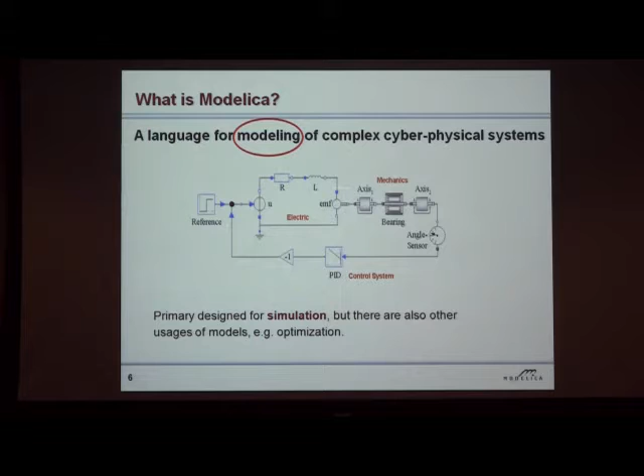So Modelica is a language for modeling complex cyber-physical systems, primarily for simulation, but increasingly used for other things like optimization together with models and generating embedded code. Modelica is a language, not a tool. The language is defined by this document, the open language specification. It's standardized by the Modelica Association, which is a standardization organization, but it's also promoting its development.

And there are at least 7 tools around. Here are some of them. I will talk mostly about OpenModelica from the Open Source Modelica Consortium. Here is a tool called MathModelica from MathCore, which nowadays is owned by Wolfram Research in the US. There's Dymola from Dassault Systèmes, which is the most widespread industrial tool. There is another industrial tool from a German company, and MapleSim, you know about, from Maplesoft in Canada.

So Modelica has a number of nice properties. It's declarative, which means that you can state equations and functions. It's multi-domain, so it's not for a single application domain; you can use it for many different application areas and write libraries for different areas. Everything is a class, a uniform design for object-oriented component programming. It's designed to be efficient from the start. Strongly typed language.

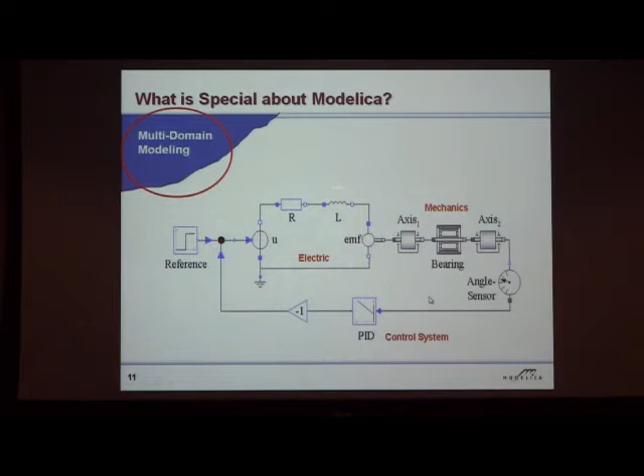I will focus on four properties of Modelica: multi-domain, visual, typed, declarative language, and hybrid modeling and simulation. So let's start with multi-domain. Here we see mechanics, electrics, and control mixed in one model. So we use model components from three different areas.

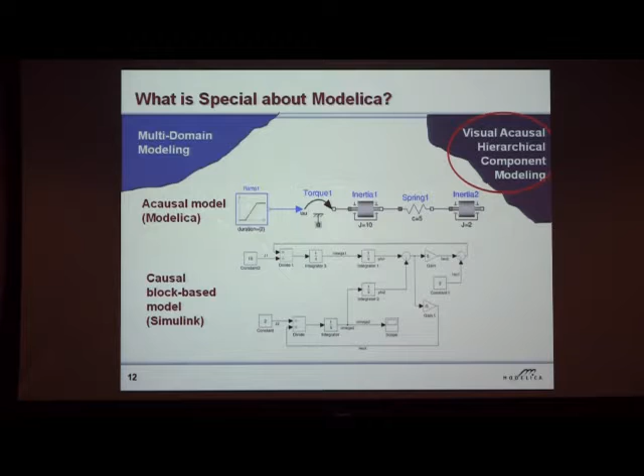Hierarchical component modeling. Here is an acausal model in Modelica where we just connected a few components. Here is a causal block-based model, which is a typical Simulink signal flow model, even though nowadays there are also libraries supporting acausal modeling in Simulink, like SimMechanics. So this keeps the physical structure, whereas the other one you have to convert by hand to signal flow.

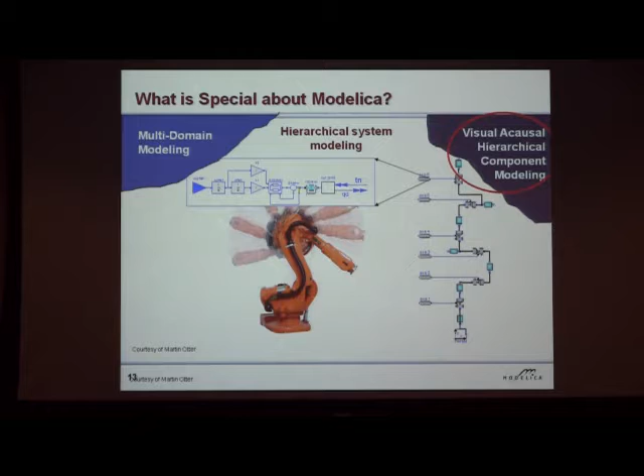Hierarchical system modeling is quite important in order to handle large systems. Here is an ABB robot. Here is the top level of another robot. You just see a few things, motors, gears on the top. Then you can expand, so you can see more detail by looking inside. You can expand that. Then at the lowest level you have equations.

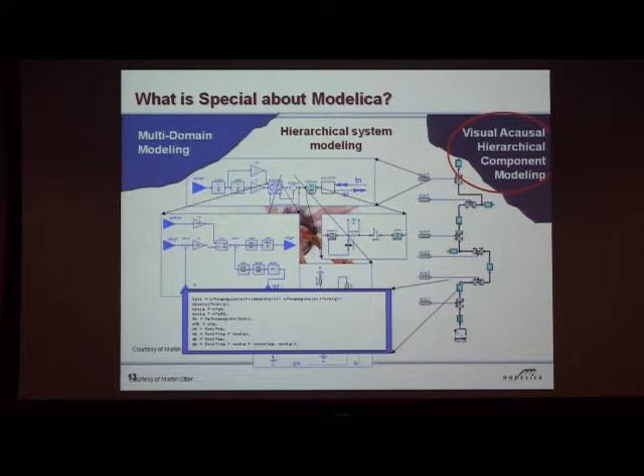So here we have some Newton equations with 3x3 coordinate transformation matrices, typical when you have robotic arms and so on. This has been made at DLR, Martin Otter, where they work a lot with robots, industry robots.

Then we have the language. So this Modelica language is, as I said, standardized. There's a standard document, and it's a textual language, even though it can be used for graphical modeling. But it's nice that it has a textual representation in addition to graphical, because sometimes textual is better and you can do more concise programming. But if you do the graphical, you can use the Modelica standard libraries.

The object orientation is used as a structuring concept. So it's used for decomposition of complex systems. It's used for inheritance, for specialization. But it's not used for message passing, as you have in Smalltalk. But if you start in the history of object-oriented programming, starting with Simula, there was actually no message passing from the beginning. We had classes, behavior, objects, and methods. In Modelica we don't have methods, but instead we have equations for expressing behavior, and also functions.

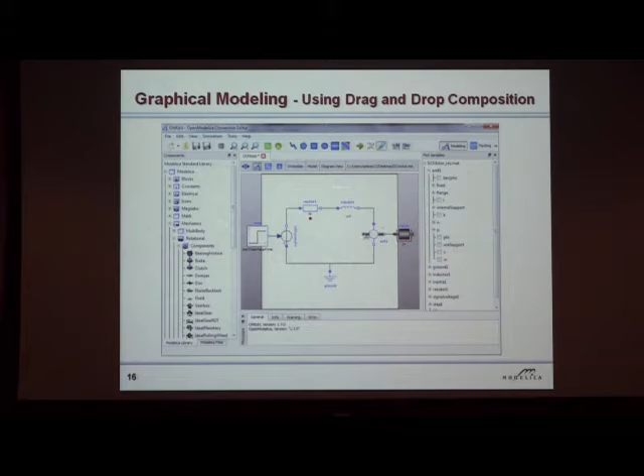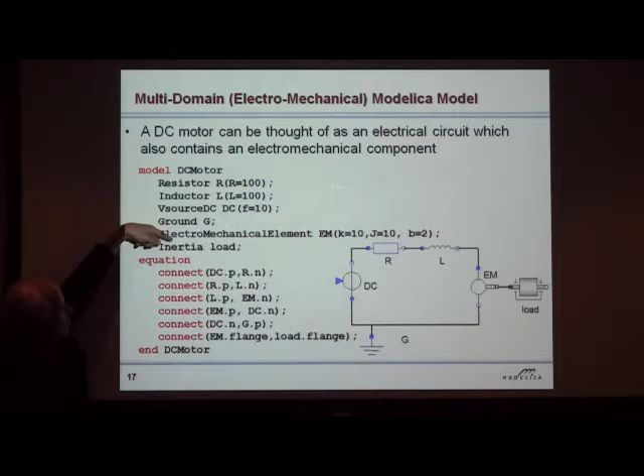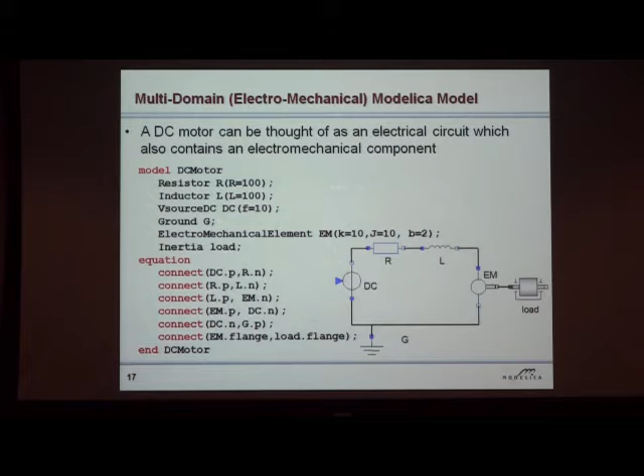A small example of a multi-domain Modelica model. Here is the diagram that you can draw using the graphics. So it has a mechanical load, electric converter, and electrical parts. You can see here that the text that's generated contains a declaration for each component, and each line here is a connect clause. This connect clause doesn't look like an equation, but represents at least two equations. It's just that it's easy-to-write syntax.

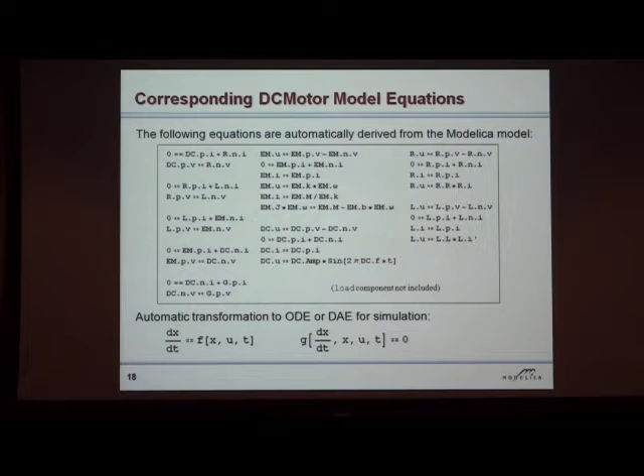So these connects here expand into two equations, according to Kirchhoff's laws. For example, the resistor becomes four equations because there are some equations connecting the port variables. Then the whole thing will become an equation system that's used for simulation. So generating this form is called flattening, because we remove all the object-oriented structure, inheritance, and so on. And here you can see the process of flattening.

Starting from the graphical or textual modeling, the source code goes to a translator that transforms it to a flat, hybrid, differential algebraic equation system. Then sorting equations according to dependency analysis, optimizing. Typically only between 10 and 20% of the equations are actually needed in the core equation system for numerical solution; all the rest can be separated, which speeds up execution quite a bit. Then code generation: typically we generate C code, C compiler, and simulation.

But we also have alternative code generators in OpenModelica. We have a C# code generator because one guy in the Czech Republic likes to use C#. He's using the Microsoft platform. And then we had a master student do a Java code generator. And then we have another C code generator for parallel C, for OpenCL.

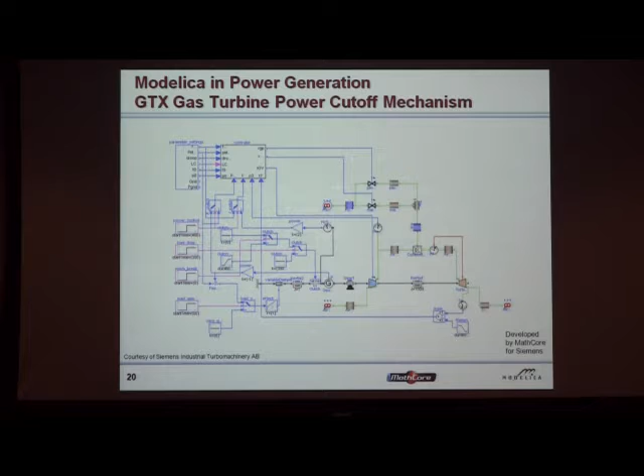Some applications. Here is a gas turbine application developed for Siemens. They had worked with Simulink 2-3 years to get the model, but they never got it working, so then they switched to a more physical modeling style. This works rather well. It's within 1% of the measurements. This is the avionics model that I showed in the aircraft before. It's just a small part of it.

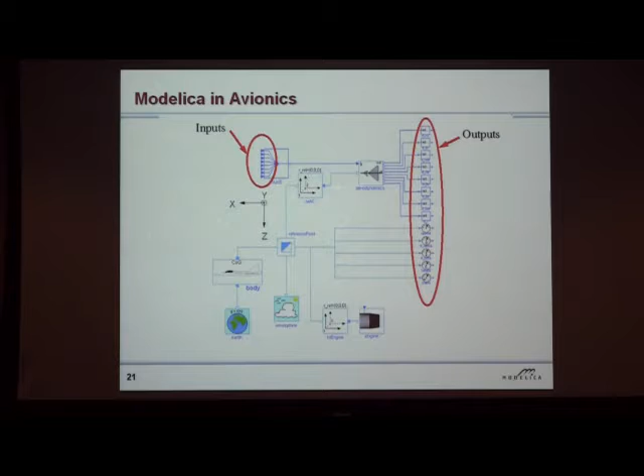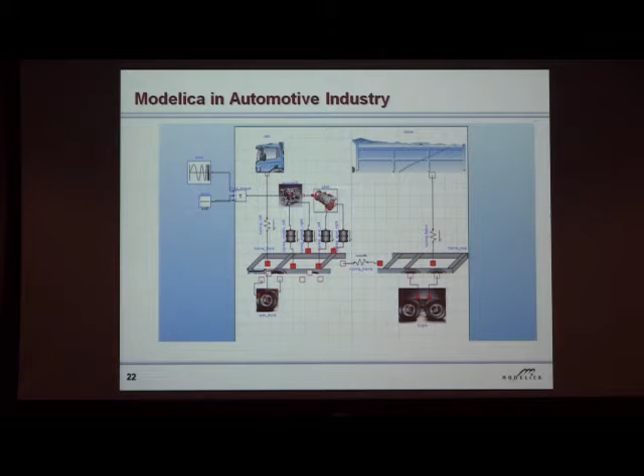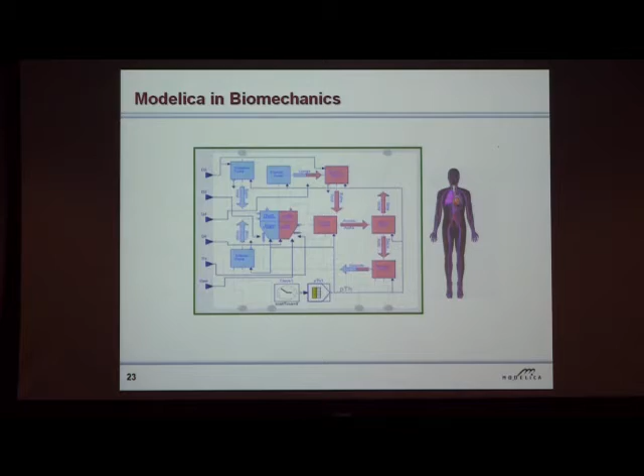Automotive industry is one of the main application areas of Modelica because you have a lot of different physics there. You have a combination of mechanics, electrical systems, cooling systems, as well as electronics. So, for example, in Germany, all the big German manufacturers use Modelica, especially for the tricky products. Also in biomechanics and biology, we have some applications, even though not so many yet, but that's just because of tradition.

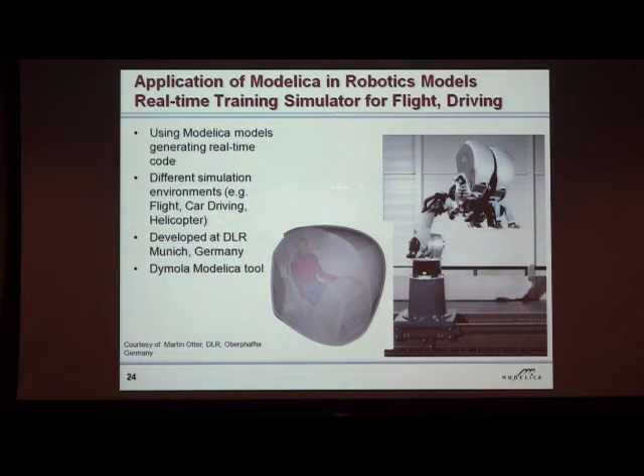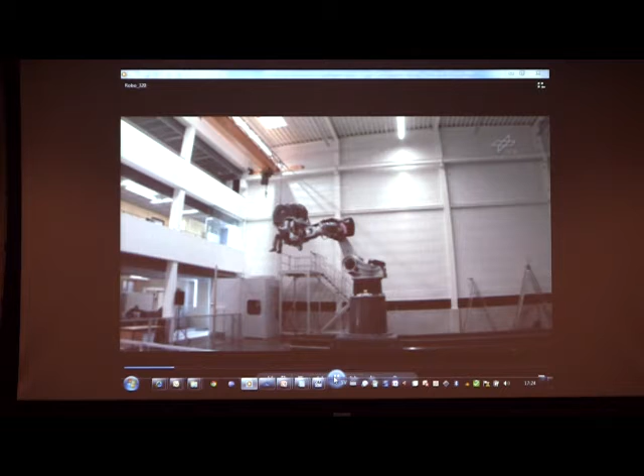Here is a real-time robotics application from the German Aerospace Center in Germany. So this is a training simulator. Here, two people are sitting up here, and this big arm is moving around, so they feel acceleration. All the models behind this are in Modelica. The control is written in Modelica. So they can look at the screen here and experience what it might be like flying. A flight simulator.

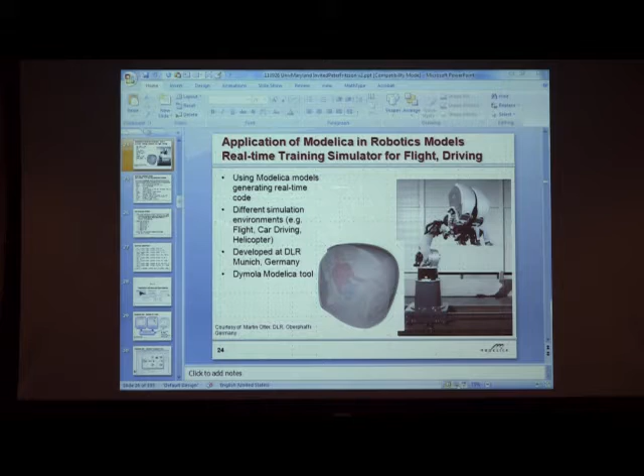As important as the language is the standard library, also developed by Modelica, which means that in reality lots of people, experts in different areas, develop their own libraries and then contribute them as open source. There are people in different areas that have contributed these different libraries. There have also been big European projects that developed about 30 libraries. About 20 of them are open source.

So the Modelica effort started in the fall of '96 with some meetings regarding publishing a white paper about an object-oriented modeling language. But it actually developed into a design effort, which none of the participants would have imagined would happen. It's still going on 15 years later and has expanded quite a bit.

After 1 year, we released version 1. I remember that because we had a small document we put on the web and the photo and so on. And we felt we had achieved quite a bit, but it turned out that this was just a small beginning and there were a lot of things missing in this document, some of which we found when our group started to do a formal specification. That formal specification later developed into the OpenModelica system.

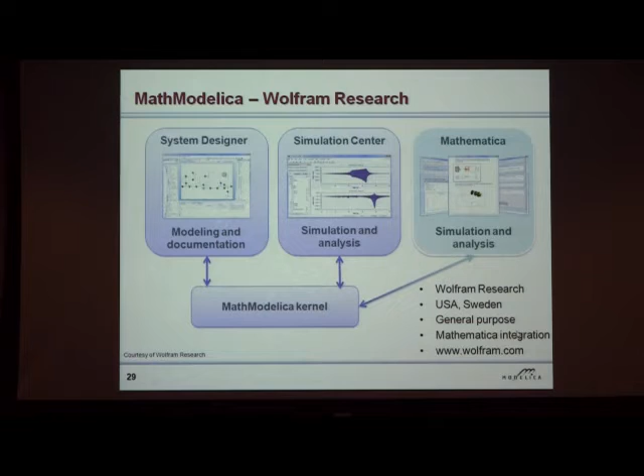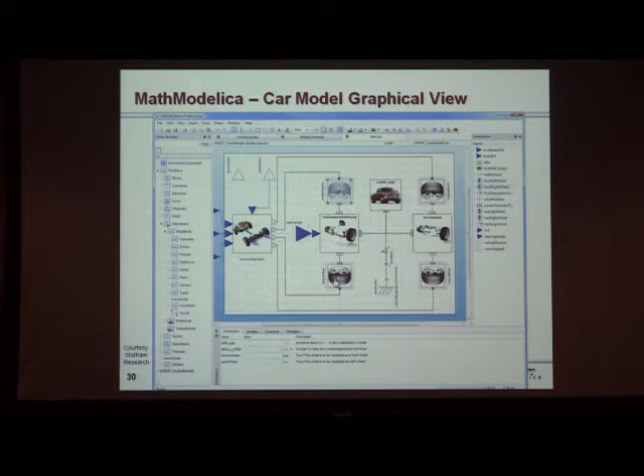So let's talk about the tools a bit. So this MathModelica is a commercial tool. It's nowadays from Wolfram Research. It was developed in Linköping, but it's now being integrated with Mathematica. So it's both working in the US and Sweden. Here's a car model where you can see you can design your own icons. And I should mention that this tool also has special support for biological simulation with pathways, and has export and import to the Systems Biology Markup Language. Here's a car model simulation animation.

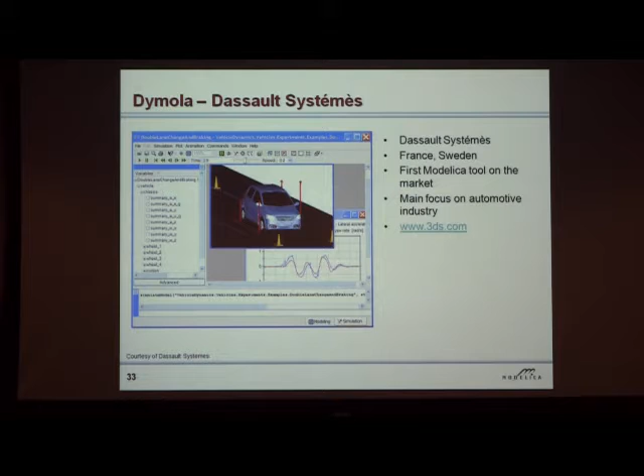MapleSim is from MapleSoft. For a while they were partners of MathWorks, but then decided to go on their own. They selected Modelica for their modeling and simulation tool, and it's fairly recently that they released the first version of MapleSim. Dymola is from Dassault Systèmes, one of the major CAD vendors. It was first a small company in Sweden that was sold to Dassault Systèmes. This is expanded and integrated in the design tools of Dassault. SimulationX is another Modelica tool. They started with their own language, then converted to the Modelica language, and also converted their libraries to Modelica.

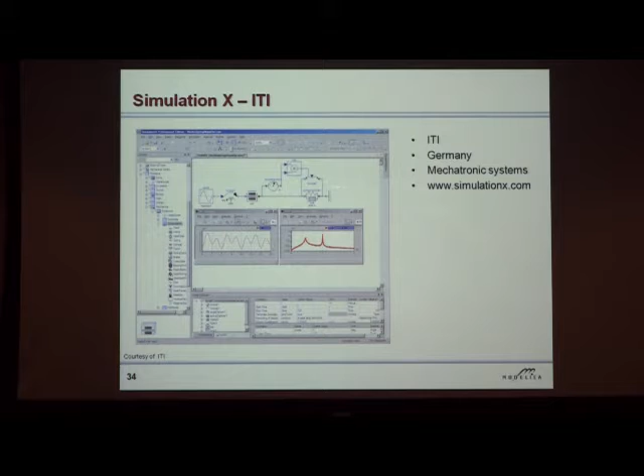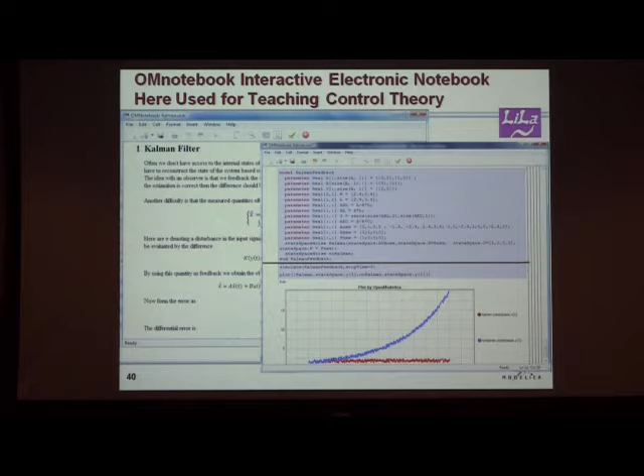How many courses do you have on that? Right now we have 2 course materials. One is called DrModelica, that's for teaching object-oriented modeling and simulation. That's using the models in my book that are available for download. Then DrControl, which is intended for a control course. And that's rather recent.

You don't have a Doctor Systems Engineering? Pardon? Doctor Systems Engineering? No, but yeah, perhaps you can do one.

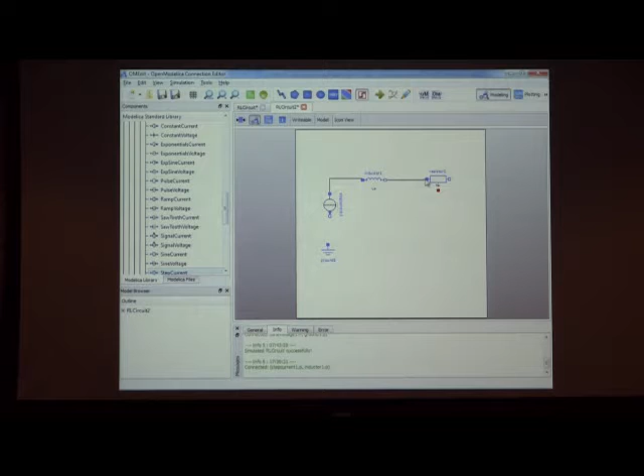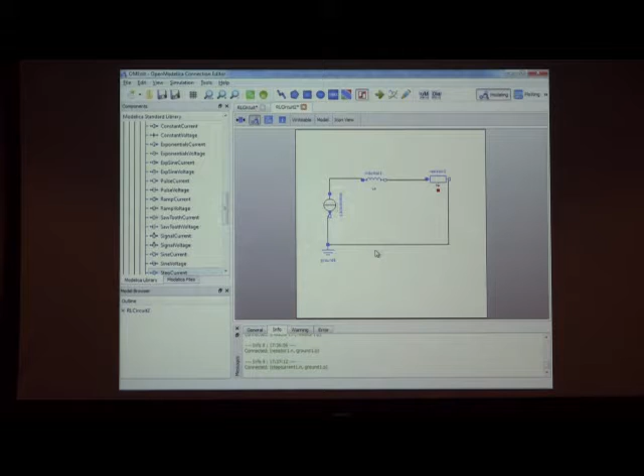And then we turn that around because we have the plus up here. So take this. So let's hope that this is connected. Simulate. Now it's compiling it to C code.

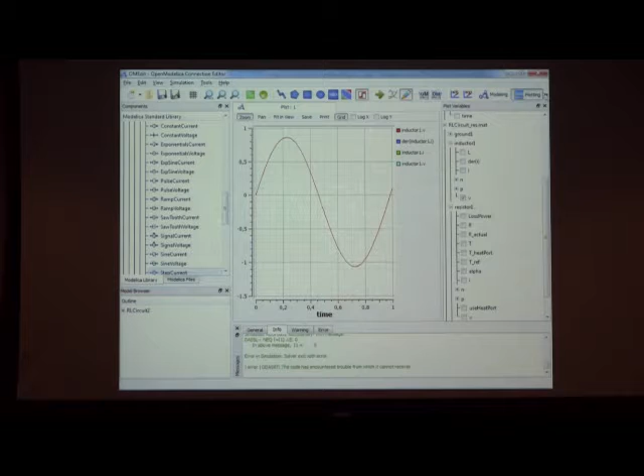Then we have a prototype of an equation transformation debugger to explain if you have performance problems or it's computing the wrong result when executing the C code that's been generated. What is influencing that? What parts of the models? That's not easy to realize by yourselves. It's important to have an explanation. It's a prototype that's not in the release yet.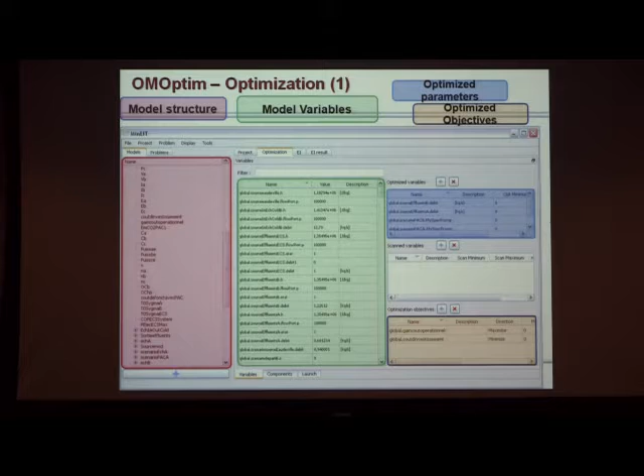OMOptim is the parameter optimization subsystem, so it can do many runs and select the parameters that give the optimal results for the cost function. And it can also have Pareto fronts, so it can optimize a combination of different cost functions.

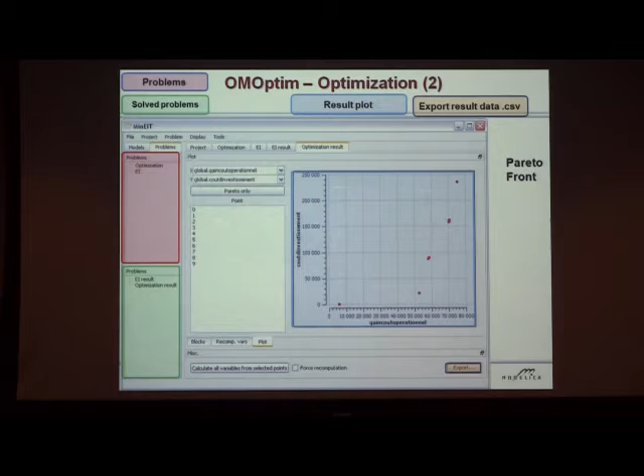What freedom do you have to put the algorithms in this? Choosing, yeah, it's open source, you can do whatever you wish, but right now it's genetic algorithms. If I want to change the optimization algorithm to something else, can I change it? Yeah, you can do it by hand by changing the source code, but in the future we would like to be able to link in a more efficient, easier way.

This is a graphical user interface. You can run it with OpenModelica, but you can also run it together with other Modelica tools, for example. Is it possible to connect this to MATLAB and use the MATLAB optimizer? Yeah, since this is open source, you can do it, but it's not done in the current tool. You would need to do it with the programming interface code.

Georgia Tech has done something like that, and the person who has done it at Georgia Tech is coming to talk here about 3 or 4 weeks later. Yeah. Professor Paredis, and they have worked together on some of the model cases. So there is room for improvements and contributions from the students and others.

Concerning calling other languages, there is external function support for calling C and Fortran. That's in the Modelica language standard. And we also implemented Java calling support in OpenModelica, but that's not standardized yet.

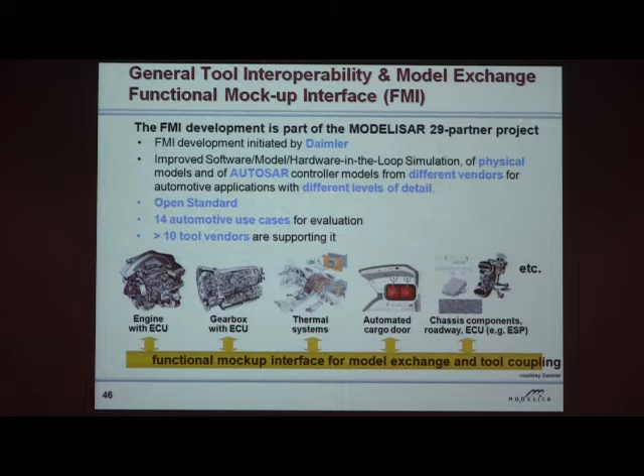And it was actually Daimler that started the project, so that would be the main thing. So it's open now? Pardon? It's an open standard, it's been published. So they have AutoSAR controller models in this? All of them? It's also about integrating Modelica with AutoSAR, and most of those things are proprietary from Dassault Systèmes, for example.

Which things are proprietary to that? Pardon? Which things are proprietary? I mean, the tools in Dassault Systèmes for coupling Modelica with AutoSAR.

But the FMI standard is an open standard, even though most of the implementations are proprietary, except there are two open implementations. OpenModelica is one, and JModelica is the other one. For FMI? For FMI, yeah. Because this tool interoperability is becoming a big issue. Yeah, with companies, it's a big issue, right?

Daimler, as an automotive company, has several hundreds of modeling and simulation tools with incompatible formats, and they want to simulate the whole car. Right. They actually do quite a bit of that. So they have finite element tools like SimPack. They have several different simulation tools, special purpose, mechanical. They have Simulink. They have Modelica. And because they have this problem, they want to run everything together. And now this is on the way, actually. So it's more than 10 tool vendors supporting the standard, and it's increasing.

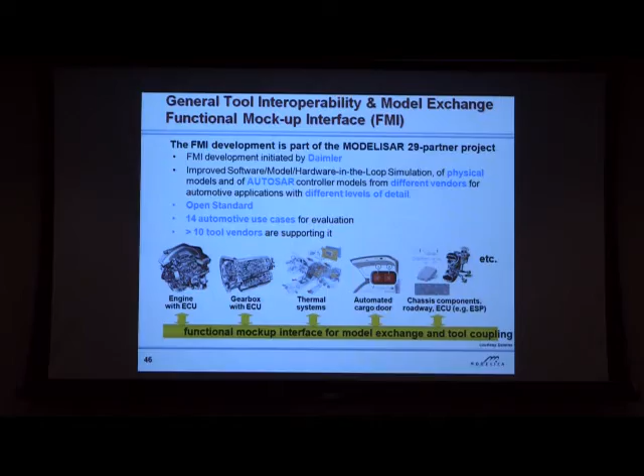In these use cases you have, say, 14 automotive use cases for evaluation. Yeah. Do they have anything like what I might want to call an impact tool? What do you mean, impact? I go and change the battery or some requirements about braking or one of the components of the car. Can I see what other things are affected? Yeah, that's a different kind of tool. But of course you could use the FMI to simplify the realization of such a thing, because then you could have different component vendors delivering their models in precompiled form.

So you can link in. What happens here, for example, is if you export a model from Modelica, it's converted to C code that can be compiled into a DLL, and it's associated with some information about the ports and variables as XML. This means that the importing tool can recognize the variables and run the simulation, but if it's compiled code, it can't look inside, it can just execute. And there is a co-simulation standard that's on the way. So I should speed up a little bit.

We also have a project called OpenProd. It's a 28 partner project. I'm the scientific director. Here we have the goal of having an integrated modeling and design environment, starting all the way from business requirements to design requirements, then modeling phase, compilation and code generation, to system simulation and software products or system products. And in the project we now have working prototypes in all these phases, even in the very early process phase.

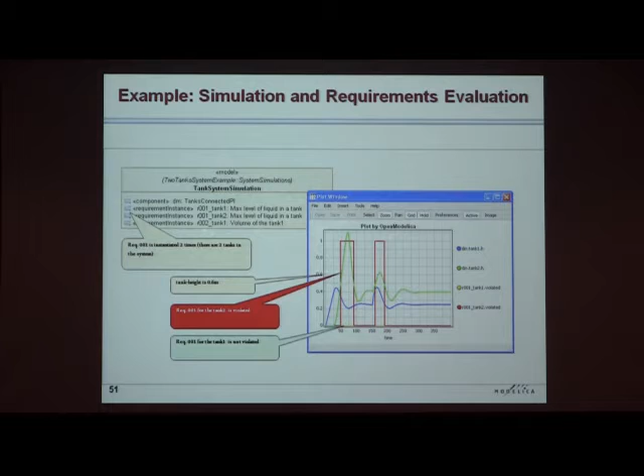Yeah, there are two different connections. One is the SIMPACK finite element tool. SIMPACK has an FMI connection. And then we have the Modelica PDE prototype from 6 years ago. There we did two versions. One was to represent partial differential equations using method of lines as differential algebraic equations. The second was to connect an external finite element tool.

If I want to do a photovoltaic array? Pardon? I want to do a photovoltaic array I'm modeling, and I want to model the chemistry, and I want to model the properties and so on and so forth. What can I do now with Modelica? It depends what you wish to do. I want to do the material properties, I want to understand the absorption, the thermal.

So if I go to COMSOL, I can build a fairly sophisticated model of that. But I cannot do some of the other things. I cannot do block diagrams, I cannot do behavior. Yeah, that's the problem. You would like to have both. Yeah, I would like to have COMSOL linked to Modelica. So that's not possible right now. Is anybody working on that? I don't know.

But if you use SIMPACK instead of COMSOL, then you can connect it through FMI. That's the only answer today. SIMPACK is open? No, it's a commercial tool, just like COMSOL. Okay. And we have plans to restart the work on PDE extensions. And if some people here are interested, we could collaborate. I would definitely.

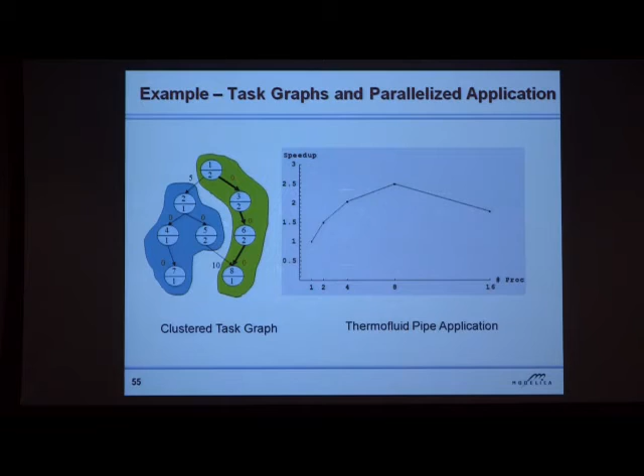Our problem so far has also been that we have had too small applications and the prototype didn't take the big applications, but we are getting to the big applications now with the second generation. Here you can see parallel equation tasks in the 2006 prototype, but the solver is still a sequential bottleneck running on one processor. In the later version, we spread out the solver, Runge-Kutta, pipelined, so parts of the solver could run on 3 different processors. So then we got a factor of 2 or 3 faster code.

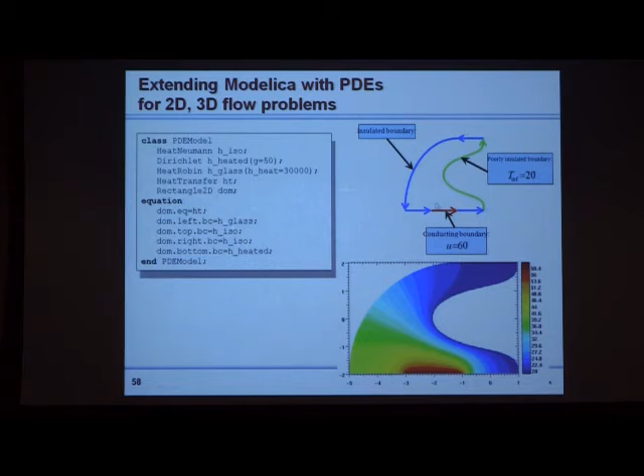And then I think I will speed up a little bit on the language concepts. There's only a few minutes left. We have Modelica functions, just like in other languages. And there's inheritance. Between classes you can inherit equations. There's multiple inheritance. You combine geometry, for example, and color. And there is something called modifiers. You can combine inheritance with declaration equations, which gives more concise code for a modeling language.

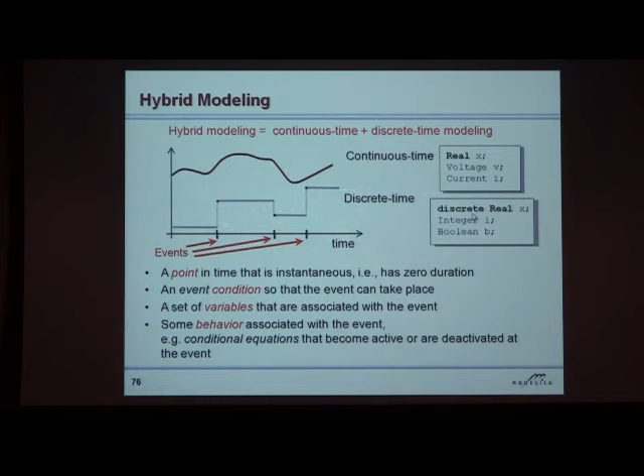And then we have hybrid systems where we can combine, as you see here, continuous dynamics with discrete events, the bounces. So continuous variables and discrete time, and then you can associate event conditions here. Two kinds of variables, continuous and discrete. Then you can have so-called if equations. So if off is true, then this equation holds, otherwise that equation. So it can switch these equations at runtime very efficiently between different modes. The compiler takes care of that.

And certain equations are only active at events, so-called when equations here. They are only executed at the events that they are sensitive to. If I do that in a hybrid system, do you have checkers so that I won't get deadlock, for instance? There's no deadlock checking built into the current tools, but there have been some prototypes.

What about correctness of semantics of time? Do you have to check for that? I can say there is a lot of work now done in the design group on the second generation hybrid properties. So many of the things that you find in languages like Signal and Lustre will soon appear in Modelica. So you're going to put Lustre things in here? No, but the language properties. So the clock, synchronous clocks, and be able to extract the clock handling and those pieces. And then you can do the same analysis as in those.

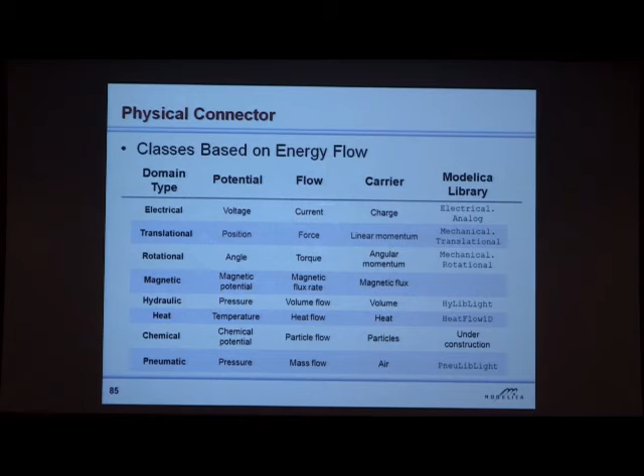If I wanted to study stability, can I take some of these variables, let's say the potential variables, and make a Lagrange function? What kind of function? Lagrange function. Can I do things like that? If I have some potential function, can I connect them and make a Lagrange function and prove stability or anything like that? I'm trying to link the modeling to performance questions. That's all. Yeah. We are learning things.

We've done a performance analyzer, but that's based on measuring the runtime performance on different parts of the model. Because we have some sort of theory, people have done a program on dissipative interconnections and all that stuff, that shows how to interconnect systems so you can maintain stability as you interconnect. We want to be able to project stability margins and things like that from the components to the overall system and back as we go along. Yeah, that's probably outside my area since I'm not a control specialist, but a computer science person.

Anyway, Kirchhoff's laws are used for expanding a connect into equations. And then you can reuse common component structure here. For instance, many components have 2 pins. You can inherit that. So here you extend, you inherit the two-pin and you just add one equation and you get a resistor, or you add the inductance equation, you get an inductor. So in this way you can reuse a lot.

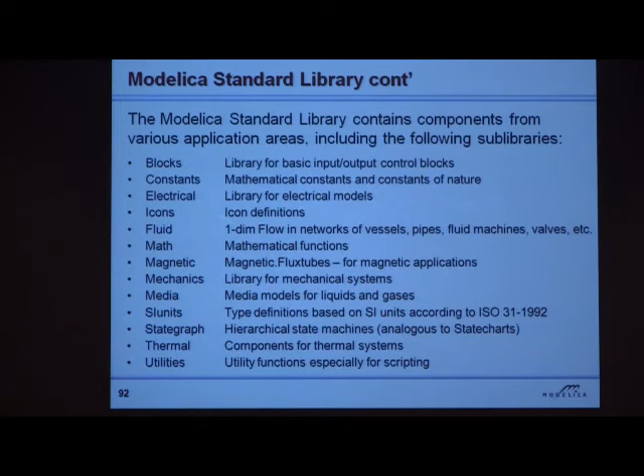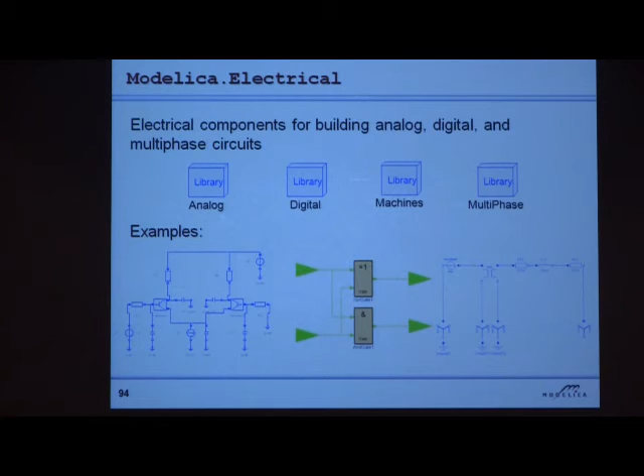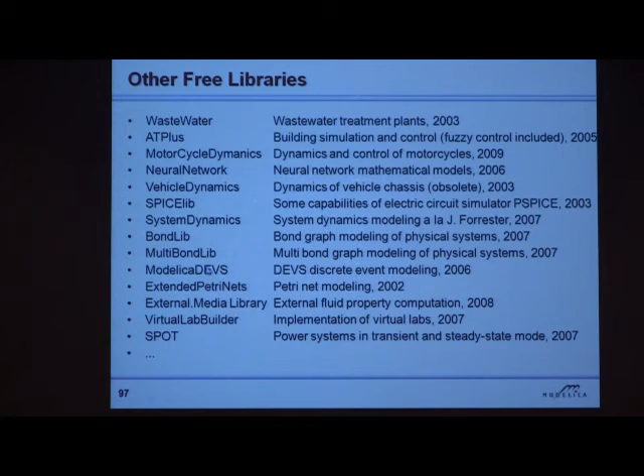So the Modelica standard library for graphical modeling is open source. Here you have many of them, but this is block diagram, continuous, discrete, logical, electrical, mechanical, 1D and 3D, state graph, which is a bit similar to state chart. And here are some other free libraries, for example, electronics, vehicle dynamics, quantity, etc. And some commercial libraries.

parts for a course. Then I came out with a book this month which is much, much smaller. It's intended for introductory courses or where you would like to learn a little bit of Modelica as a part of another course. So if the other thick one would be scary, this is quite thin and shouldn't be as scary.

Are you planning on having a new edition of the thick book? Yes, I'm planning on that. I'm actually working on it. So I'm trying to get some time now and then. And I've updated many of the chapters, but there's still a bit of work left. And it would fit well time-wise together with the coming 3.3 standard, which would be good because then we'll also get the improved synchronous features.